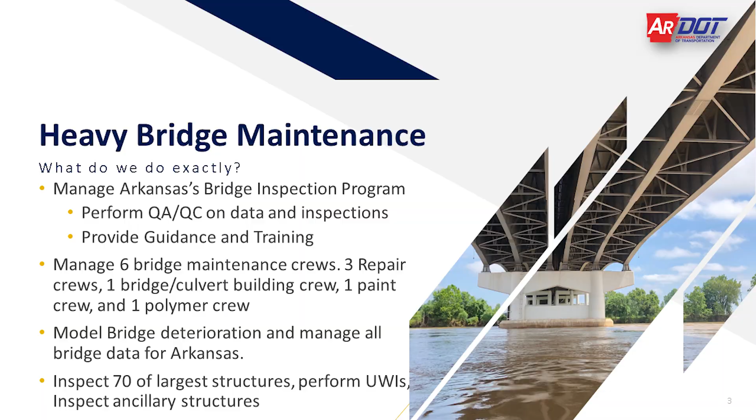So again, I want to point out what heavy bridge maintenance is. If you didn't hear my talk yesterday, heavy bridge maintenance is pretty much the centralized inspection and maintenance office for the state of Arkansas. And in our central office, we have our specialized teams, the teams that inspect the major complex bridges, as well as what I'm going to talk about today, our dive operations.

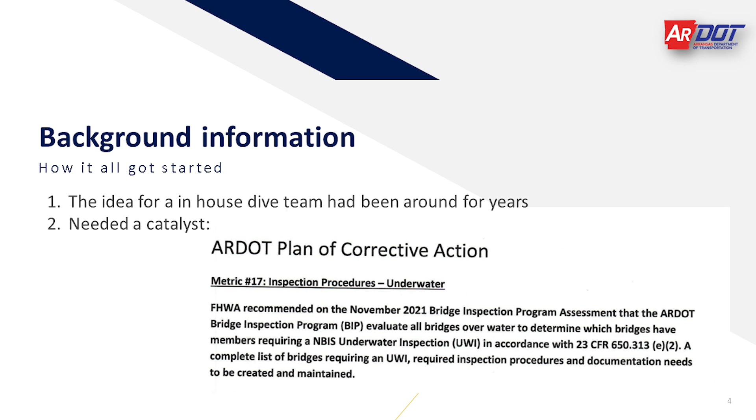Okay, so more about background information. The idea for an in-house dive team has been around for many years. It was talked about when I first started, but there were some hurdles to jump through, and we also needed a catalyst. So about a year and a half ago, we had this catalyst in our program when FHWA did a review. We had a plan of corrective action. They're stating that we need to take an inventory, do a proper assessment, and figure out which bridges we actually need to be diving. So that was kind of our catalyst for this.

And so in the process of this, we used a lot of GIS tools, a lot of NBI data. We were looking at the whole inventory of bridges to figure out which ones need a dive, and even which ones need what we call a bobbing inspection. So snorkel, it might be that 4 feet of water that Graham was talking about yesterday. You need somebody in there checking out piles that are not going to be dry to inspect at some point.

All right, so we did some file reviews, some GIS, and we're looking at all the bridges crossing water. Then we looked at every single bridge to determine if it needs a dive or not. And also as part of the PCA, FHWA gave us a 12-month deadline. So we gotta dive all the bridges that are required of us within 12 months.

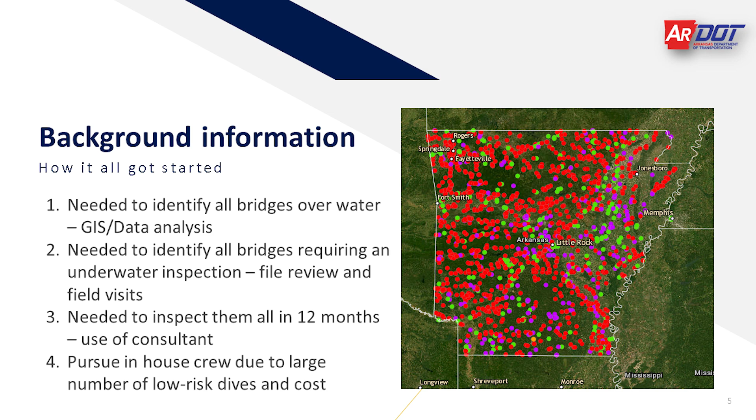So the primary thing we used to solve this was our consultant at the time. Consultants are very helpful, and we had a great one that we were working with, and they stepped up and helped us do a lot of this. But at the same time, we saw the opportunity to do some of this ourselves, because there's a lot of dives that we're calling dives that are really kind of like bobbing inspections. So we saw an opportunity to do a lot of this ourselves because of cost and the low risk for us.

Okay, so we're going to get into some of the requirements. There's a lot of requirements involved in diving. We got FHWA requirements; everybody knows FHWA. There's a lot of safety requirements, OSHA and things like that. Then you get into training requirements, what's required of us and what we're going to require of our guys, and then documentation requirements.

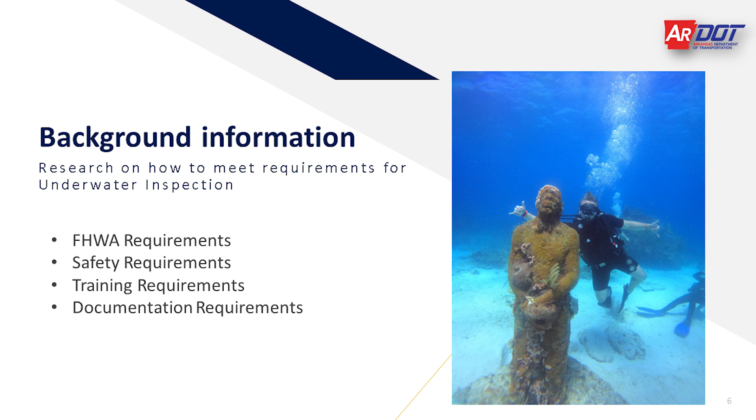Arkansas is not a coastal state, so if you can see the hand in front of your face at a couple feet, you're having a good day.

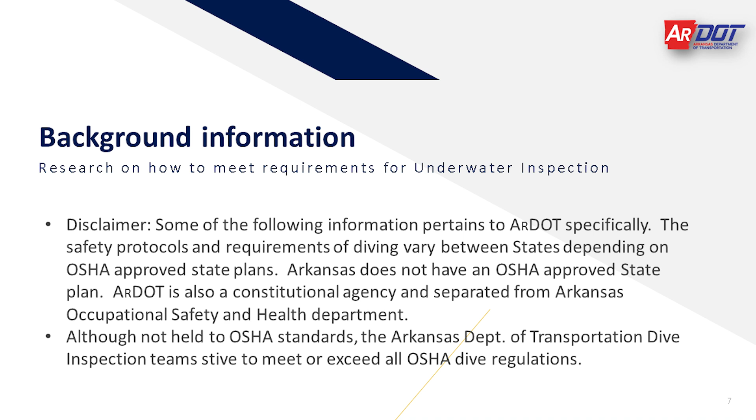Okay, so I want to throw this up there, and I'm not going to go into the very specifics of this, but consultants are normally required to be ADCI certified. That's an OSHA-approved way to go for safety that states or the government require. But in Arkansas, and it depends on the state, it's about 50-50 around the country, Arkansas doesn't have an approved OSHA state plan.

That means that ARDOT employees don't fall under direct regulations of OSHA. So that's just something interesting. So that's how it is around the country. But Arkansas falls under state regulations, so we have state safety regulations that we've got to follow.

And then I also wanted to put it in here, although we're not held to OSHA safety standards, we're making sure that we are going to meet or exceed those OSHA safety standards. So just some clarification and an interesting thing to note. But all consultants, contractors, everybody working for ARDOT have to meet or exceed OSHA, and they fall underneath the regulations of OSHA. Just interesting.

Okay, so some of the requirements that we put in place, and I want to pause here. We didn't make existing employees do this. For years, we had inspectors that talked about it, or inspectors that were divers, like Andy was a diver already, and he's like, I really want to do this because diving is fun, a cool use of my time, or a way we can help better our inspection program.

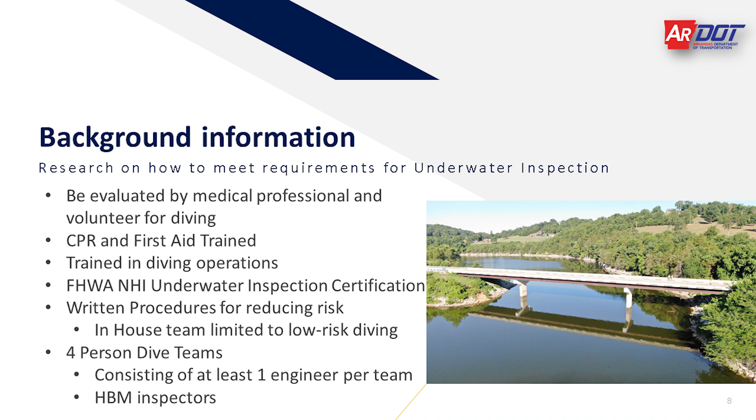That's 130 feet deep. What we're targeting is dives that are typically about 10 feet deep, and that's the majority of them in the state. So low-risk dives: we're looking for a little bit of visibility, low flow, and not very deep. So that makes our risk very decreased compared to the Arkansas or Mississippi River, where you can't see, you've got a lot of flow, and it's really deep. That increases your risk right there.

And then we're doing 4-person dive teams, and we want one engineer as part of each of those teams. This past year, this will be our second year of it. It's not that we have full-time divers, but that might be what we're looking for in the future. This is a late summer task that our heavy bridge inspectors get to do.

Okay, and I kind of just talked about reduced risk, but our max depth is 25 feet. If you know diving, 33 feet is kind of your limit where you might be susceptible to getting some nitrogen buildup. So anything less than that, you can come to the surface immediately. And then we set a limit of 1 knot, what I was just talking about, and then debris.

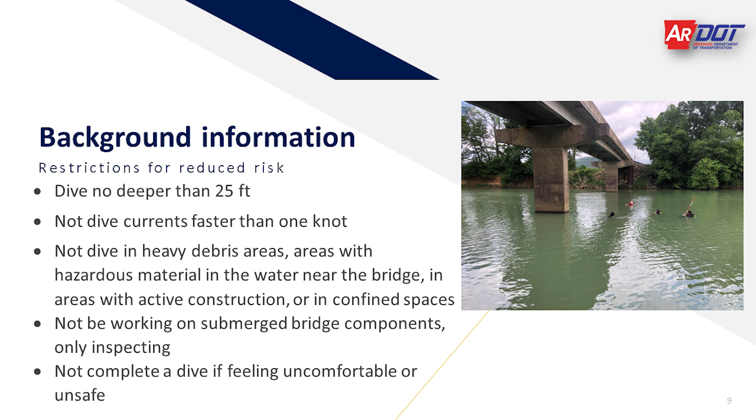I think Graham talked about it yesterday: if there's debris at a site, they'll let somebody know, the maintenance guys clean it out, and then we come back. So that's what we're doing as well. You don't want to be confining your space in timber that's all wrapped up. That is an increased risk. And then we're not going to be working on components, we're just going to be inspecting. And of course, we're not completing a dive if you're uncomfortable and unsafe.

Okay, so the inspection process. What we were able to achieve last year and what we're going to try to achieve going forward is 2 bridges per day, depending on proximity. We're not talking about the Arkansas or Mississippi River, we're talking about these small crossings. The picture in the upper right is our typical small crossing. You've got four reinforced concrete columns in the water, and that's what the dive consists of.

So we want to inspect from the high water mark everything down, and then below the water line. So that's our typical bridge, and if they're in close proximity, we can do about 2 a day, 1 in the morning, one in the afternoon. And remember, we've got 4 people, so 2 are going to be the dive team. It takes a little bit of time to set up your equipment. What we've gotten used to is the 2 divers setting up their equipment.

And at Arkansas, we use a lot of drones now. So we got one guy that's flying a drone. The other guy is also watching the drone, making sure he's being safe around traffic. And then they're also taking channel cross sections from the upstream and downstream. So they're preparing the notes. And the other couple of guys are looking for safety issues.

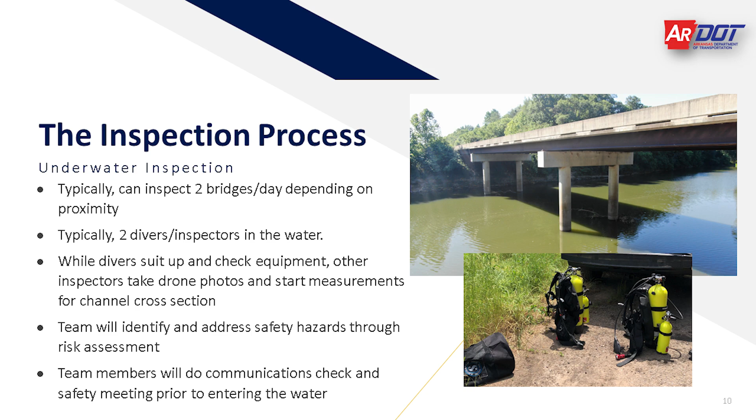We're looking for that debris. We're looking for, if there happens to be alligators. Luckily, we didn't see any last year. So we're looking and identifying risk before we ever get into the water. And then I have a video in here, but I don't think I'm going to play the video just for time. But I'm going to talk about it.

We do use communication. So we have a buddy phone system. A lot of consultants and dive teams probably have a similar system where you can talk diver to diver, and then topside. You can be taking notes and talking to the divers there.

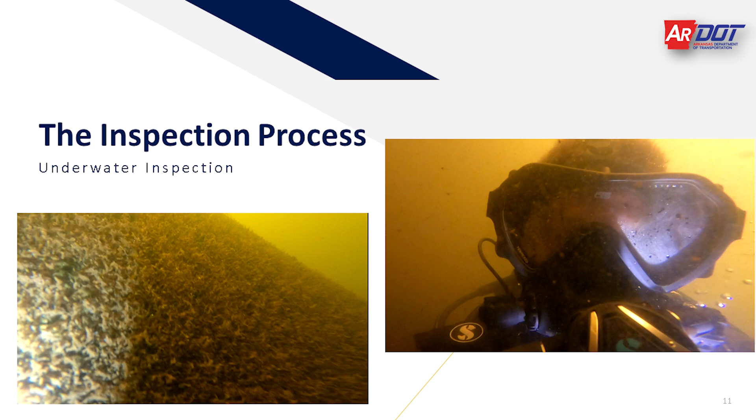One of our divers, and so the regulator goes into the face mask, and you got your buddy phone, kind of push to talk. I want to see if I can use the laser. There we go. So this push to talk button, you push and you get to talk to either the other diver or to the topside. Of course, our regulator, and then these OTS masks.

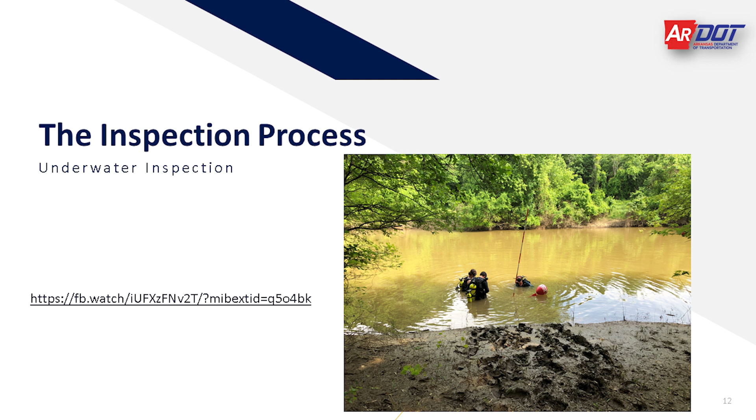But this is more like our typical water. It's very murky and muddy. You're gonna have little to no visibility, and then that's our dive team getting ready. You see here, as a part of OSHA regulations, we have a completely separate air system. If our primary air goes out, you have an extra regulator and a small tank to be able to breathe to get back up to the surface. So safety stuff. We're going to skip the video for now. If we got time, we'll come back.

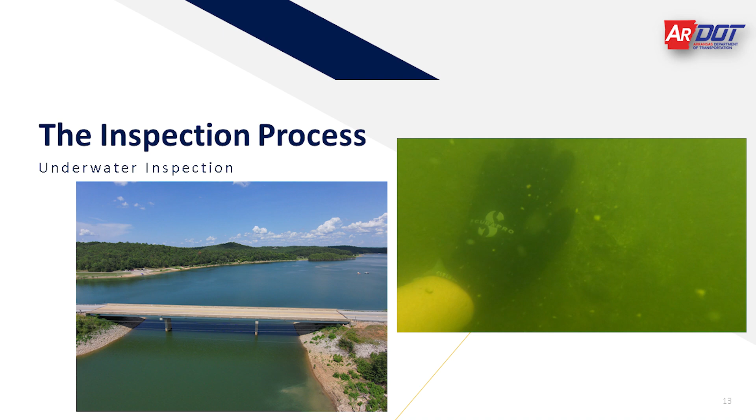And there you go, you got what we're seeing underneath the water. So it's pretty low visibility. It's not like the Cancun dive that I got to do. Another typical, what photos we're seeing.

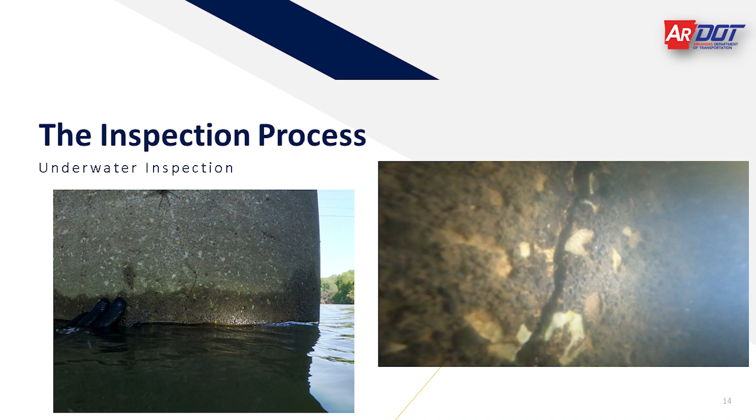Some interesting things and why you want to have divers is because, like here, I see there's a hairline crack. It might be a CS2 crack on the surface, but I was actually diving this day and I followed this down about 10 feet, and the crack just starts growing and growing. So that's why we send divers down, because you want to be able to inspect the elements underwater, right? And you wouldn't have been able to see this, and it wasn't documented in the topside report because they're not diving. So that's some of the reasoning behind why you need a diver.

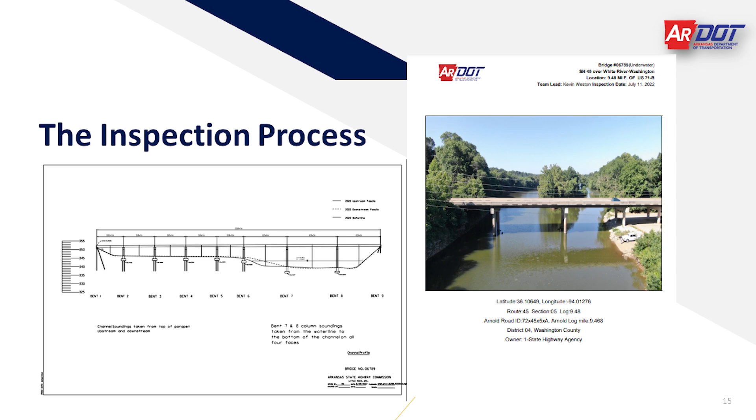Okay, and then the inspection process. Like I said, this is that same bridge I showed a photo of earlier, and these photos actually came from that bridge. So the guys are taking channel cross sections. You're going to be doing upstream and downstream, as well as preparing an inspection report.

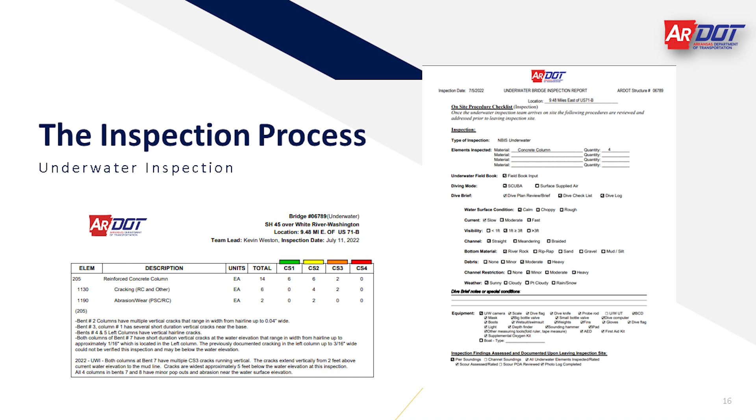And one thing we were able to do when we worked with our consultants and our inspection software last year is that we're having any consultant that's working with us put everything in our inspection software, the same thing our in-house crew would do. So the reports look almost identical, and that's what you want. No matter which inspection team you send out to a site, we wanted the same product back. We wanted the same type of deliverables.

There's some more screenshots of our process and the underwater inspection procedure, and then elements we're collecting. So interestingly enough, I'll just add this, FHWA requires all NHS bridges to have elements, right? Well, we do all state-owned for elements in Arkansas, but one thing we had to start doing this past year is we wanted to do element level inspection for all underwater inspections, even if they're county and city-owned. So that's what we're doing. We're putting in elements and taking defect quantities for city and county too. Those won't be submitted to FHWA. We're just doing that to keep up with the condition.

Okay, so we're going to talk about some outcome and lessons learned. We've learned a lot over the past year. This will be our second year to do this. We're making a lot of improvements this year. So if you look at cost, and a lot of us talked about cost of in-house operations versus contractors yesterday, and there's a lot of reasons for that. But if you're looking at a similar bridge, and you take into account salaries, benefits, and everything, of course, we're not talking about overhead because we're going to have the overhead either way. It's about half the cost, and that's with any consultant. So Arkansas can do this for about half the taxpayer dollar, I guess.

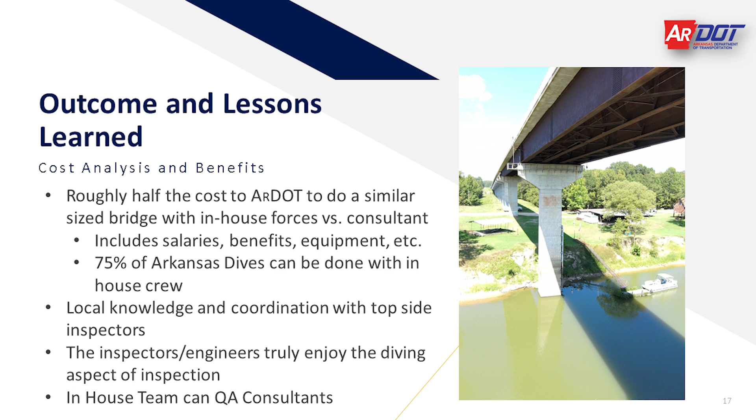And then what we're gonna be able to do now is have a quality assurance on our consultants, and then also have a quality assurance on our in-house dive team. So what we're thinking about doing going forward is if we do have consultants, to be able to send out our own crew to do a quality assurance inspection and making sure that stuff lines up. Same thing with our in-house crew. If we have one team do it, we have enough divers that we can send a completely separate team and be able to make sure that the information is lining up.

All right, so areas for improvement, and we're going to be making a lot of improvements this year with our dive operations. So kind of what I was just talking about, our QA dive team will be able to QA consultants. Now we're not going to be hopping in the Mississippi River doing a quality assurance check there. But there's certain bridges, down to a certain depth, that we can do a quality assurance check. And then we want to increase our use of underwater cameras. So GoPros are awesome. Not supposed to advertise for products, but GoPro is the way to go.

And then also increase training and safety training. So we're working with a consultant right now to help us improve our in-house certification process. So to meet certain regulations, to make sure that this inspector that wants to dive, even though he passes a medical exam, is qualified to dive based on physical conditions and other things.

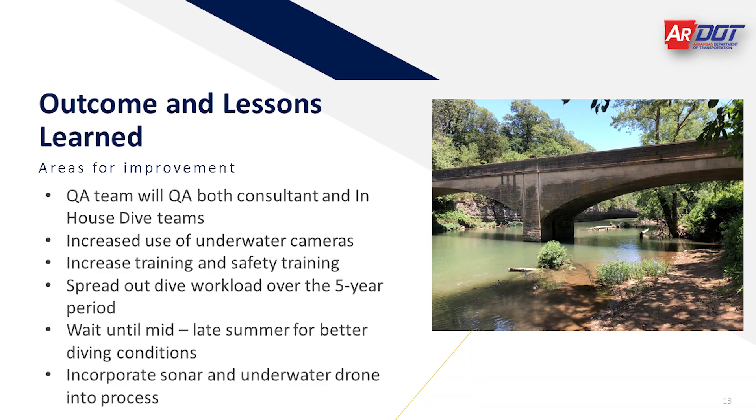If you're hopping out in the water in May in Arkansas, for one, it's cold, or two, you might be diving 2 or 3 times as deep. So let's make it easy on ourselves.

And then also we want to incorporate our sonar. I've given presentations in the past, and I think a couple of years ago I talked about our multi-beam sonar, and I think Michael will be talking about some sonar. So we want to incorporate sonar with our underwater inspections. And then also we're looking at an underwater drone. So being able to send a drone down before we do an inspection as a screening tool, I think will be a huge benefit. So with that, I'm gonna open it up for questions.

Questions? Okay. So how many bridges total do you have? So right now we're still adding some based on water conditions. Right now we have about 215, I think. The exact number I'd have to look up, but about 215 bridges that require dives. That's probably going to go up to 250, 260, because some of the topside inspectors are saying, hey, we probably want to look at this one because it's at that 4 to 5 feet mark, and we've obviously heard from Graham that there's issues, and you want to get somebody out there.

I also want to add a point, and I talked about it a little bit earlier, yeah, this is a dive team, but a lot of times it's me and the inspectors, or the inspectors throwing on a snorkel, and you can do it mostly with a snorkel. If you're at that 4 to 5 feet mark, instead of putting on 50 pounds of equipment and lugging it around in the mud, it's best just to throw on a snorkel and get it done.